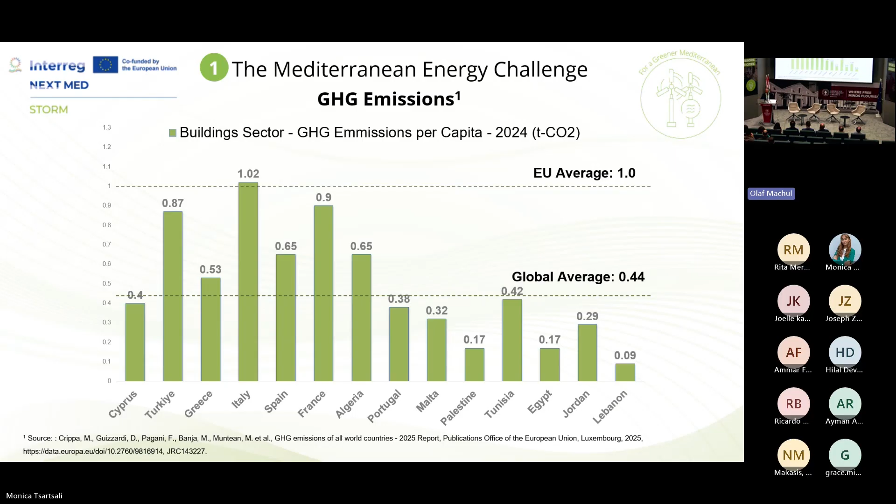The global average, if you just want to have a feel of the numbers, for the greenhouse gas emissions is around 0.44 tons of CO2 per capita. The EU average is 1. And you can see here that many countries in the EU, in the Mediterranean, are at the higher upper bound of the emissions. There are other countries that have less emissions. But the idea is to see from where these emissions are coming.

And if you only take space heating of buildings, you would see that the source of energy that is used to do space heating is generally from fossil fuels, even with all the effort that has been done in the last 20 years to support the use of renewable energy. So if you look at the statistics, there's only 33% of the demand for space heating that is being replenished by renewables in the EU. If you look at Lebanon, it's even worse. I mean, 90% of the sources of energy for space heating is fossil fuels, whether it's diesel, whether it's gas, combination, electricity, etc. So this is the challenge.

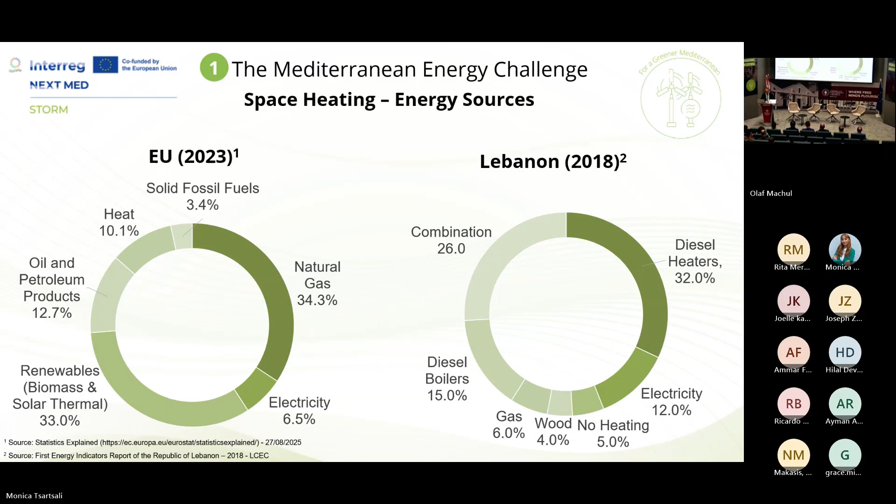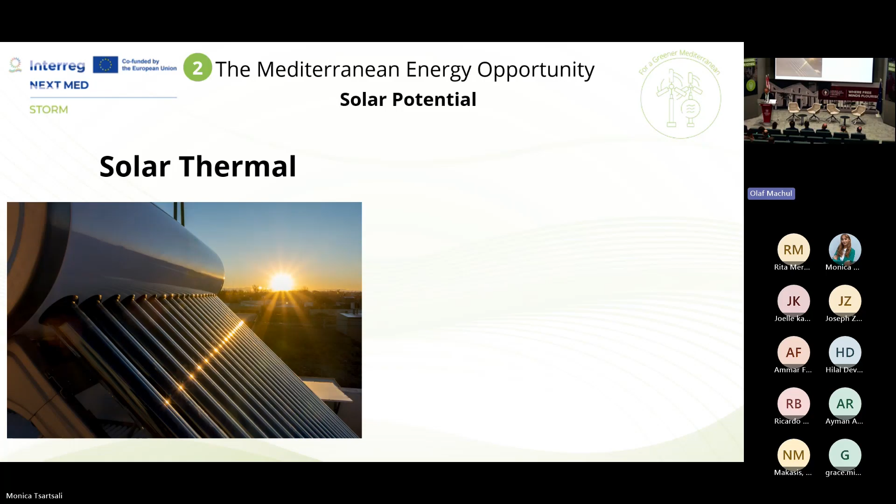Now, how do we harness that, or how do we make use of this advantage? There is technology right now that allows us to use basically sunlight to change it to energy. The 2 most common technologies that are available out there are either solar PV, and this is for generating electricity, or solar thermal, and this is basically a technology that allows us to heat a certain fluid. It could be water, a mixture of water and other material, to get thermal energy and then try to make use of it. All of us have seen these on roofs, whether the PVs or the solar collectors.

Now, the problem here is that when we talk about space heating in particular, as an example, when we need space heating, it's in the months that the sun is not there, or it is basically less available.

And the irradiation is at its lowest. So there is really a need to be innovative when it comes to figuring out how to use the solar potential that is in the Mediterranean. And the thing that comes to mind to try to match this mismatch between the availability of the sun and the need for the heat is by trying to store that energy.

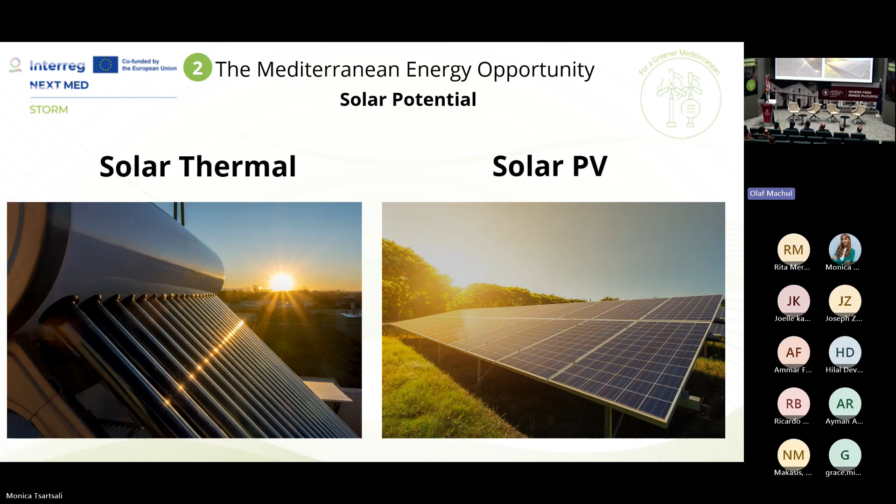So try to collect it in the months where it is available, put it in a place that will hopefully keep it there as much as we can, and then use it when the winter comes to try to provide space heating to buildings. So this is the idea of seasonal thermal energy storage. The question becomes, where do you put that heat? And here also there are alternatives.

One of the alternatives is to put that heat in the ground and store it in the ground, natural soil, natural rock. And in this technology, we're talking about having to drill in the ground to be able to create some kind of heat exchangers that would allow us to transfer the heat from the fluid that is coming from the solar collectors to the ground. In a minute, I will go into the technology a little bit more and explain what is happening.

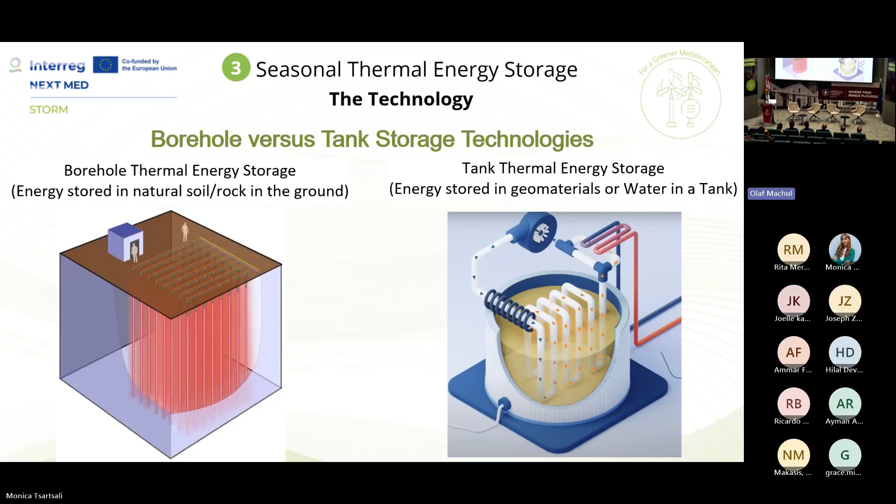The other way to store that heat is by creating artificial tanks. So we can create a tank that is made of steel or concrete. It could be above ground, it could be underground. This is a manufactured tank, not a natural soil or rock like the borehole technology. And then you have to insulate that tank and store that heat in it and hope that it will remain there for the season of charging until you reach the winter where you want to discharge it. There are so many permutations to these technologies. We will focus on a couple today, and I will show a couple of case histories before we start.

Now, what is the technology? The technology, as I said, in a very simple step-by-step procedure. You have to use some kind of solar collectors to be able to get the energy from the sun. There are so many technologies out there. There are flat plate collectors, evacuated tube collectors. Doesn't matter what it is. The idea is that you get a certain square meters of these collectors, and then you circulate a fluid through them. That fluid will increase in temperature to values hopefully in the order of 80 degrees, 90 degrees.

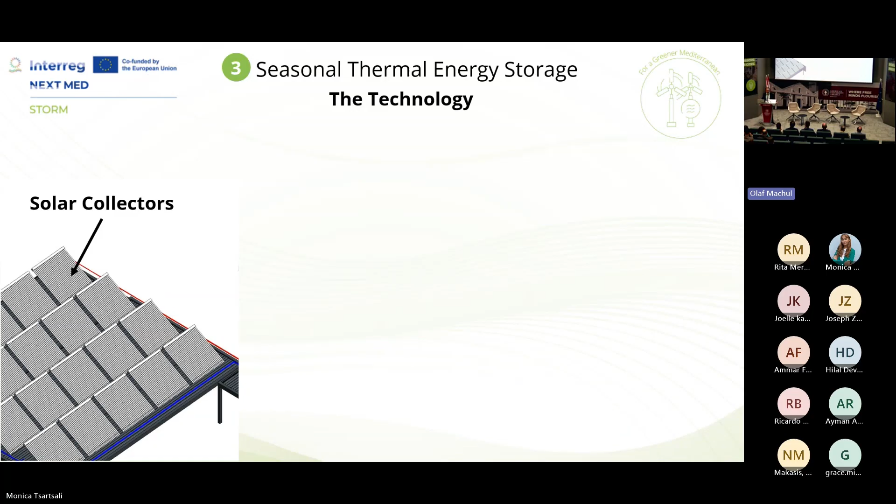And then you take that hot fluid, and for the case of boreholes, you drill boreholes in the ground, maybe up to 30 meters, 50 meters, 100 meters, depending on the application. And in those holes in the ground, you put tubes. And these tubes basically allow you to circulate the hot water through a pump. And if you circulate at the right flow rate, you will give enough time for that heat that was collected to enter into the rock or the soil. And by the end of the charging season, you could end up with the rock in that location having temperatures in the order of 40, 50 degrees, depending on the application.

Now, unfortunately, there's no way until now to keep that heat in the ground. So by the time you reach winter where you're going to use it, a big portion of that heat will have dissipated into the rocks that are beyond this borehole thermal energy storage system. So there are losses, of course, but still what remains is enough to have an impact. And it's all renewable energy, pure renewable energy that you can use for space heating.

So the next step, after you have charged the ground up to 50 degrees, let's say, when the winter comes, you circulate cold water now in the ground. As this cold water circulates, it gets heated up, and usually you pass it through a buffer tank first, and then you take it to the building. So if the building is now using diesel oil to heat water, to heat the radiators or the underfloor tubes, now you use hot water that's coming naturally from the ground, 100% renewable, to heat your homes. Same technology, same everything, except that the source of the heat is not burning fossil fuels anymore. It's heat that was collected back in the summer and that remained in the ground until the winter season.

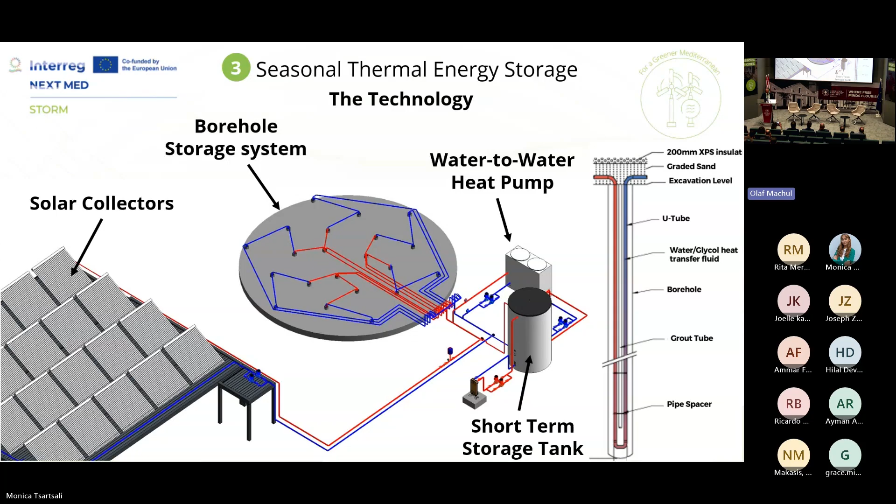So I will share with you 3 case histories where this has been used efficiently, and these come from 2007 all the way to 2025. The technology, as you will see, is improving. People are doing tweaks to make it even more efficient. The cases: one of them is in Canada, the Drake Landing. The other one is in Norway, the Fjell School. And the last one is in Slovenia.

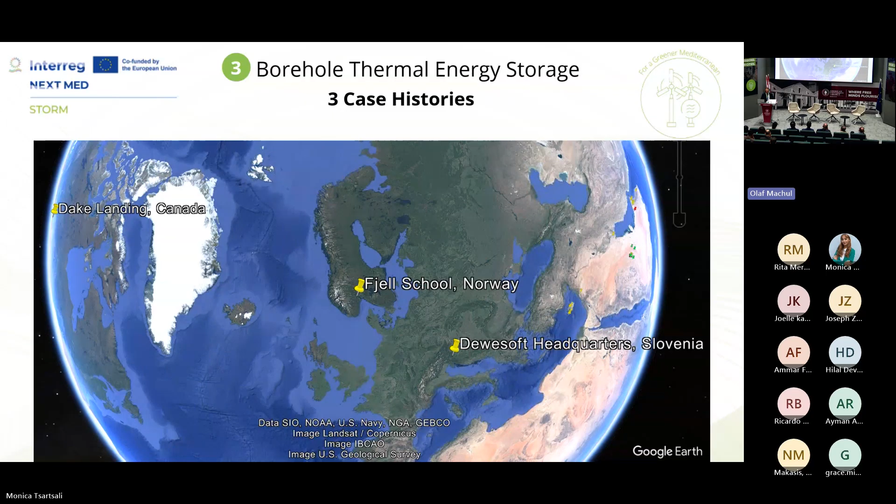So let me start with the one in Canada. This is one of the most famous case histories where this technology was really demonstrated. This case involves 52 homes in Drake Landing in Canada. These homes are in the most severe winter conditions in the world, sub-zero degrees throughout the winter.

In this particular case, there were around 2,300 square meters of solar collectors that were installed on the parking garages of all these homes. And these basically had the function of collecting hot water. The project basically involved harnessing all this energy and putting it in the ground through 144 boreholes that were drilled to 35 meters in the ground. One of the largest borehole systems at that time.

During the charging season, which is the summer and part of the spring, 700 megawatt hours of thermal energy were harnessed and pushed into the ground and stored. By the end of the charging season and during the extraction, only 300 megawatt hours were able to be extracted from the ground, giving this system an efficiency of around 35%. So they were able to collect 700, but at the end of the season, they were only able to use 300 or 350. So this tells you something about the efficiency of this whole system in its existing practice.

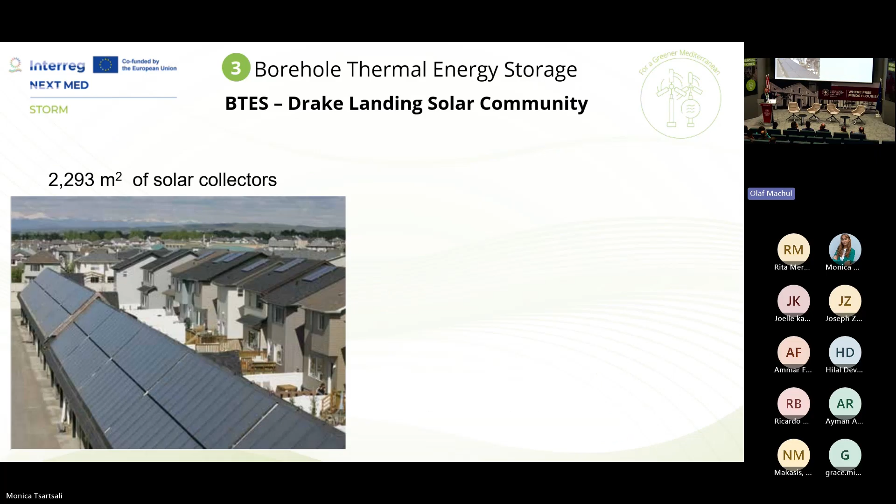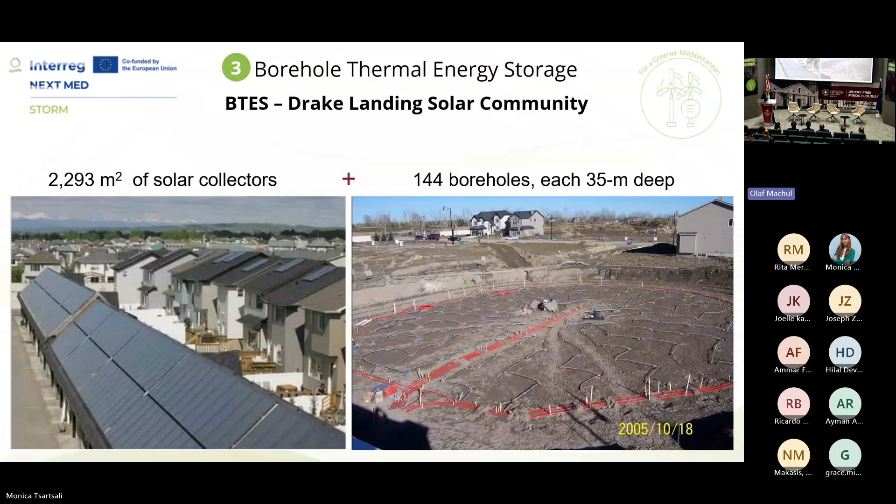We're very excited that we're going to be implementing, as part of STORM, 2 of these systems, one in Beirut and the other in Palermo. And we will get the chance to talk about them today in detail. The team will be presenting them soon.

One of the key secrets for having this system work efficiently is if you already have a district heating system existing in the region. And this is not present in many of the Mediterranean countries. This is present in almost all of Europe. The presence of a district heating system allows you to plug your borehole thermal energy storage into it. So this is a challenge when you're dealing with an area that doesn't have district heating and you want to distribute the heat to a lot of buildings.

Some numbers, and I think I need my eyeglasses to see them here. Maybe I can see them from there.

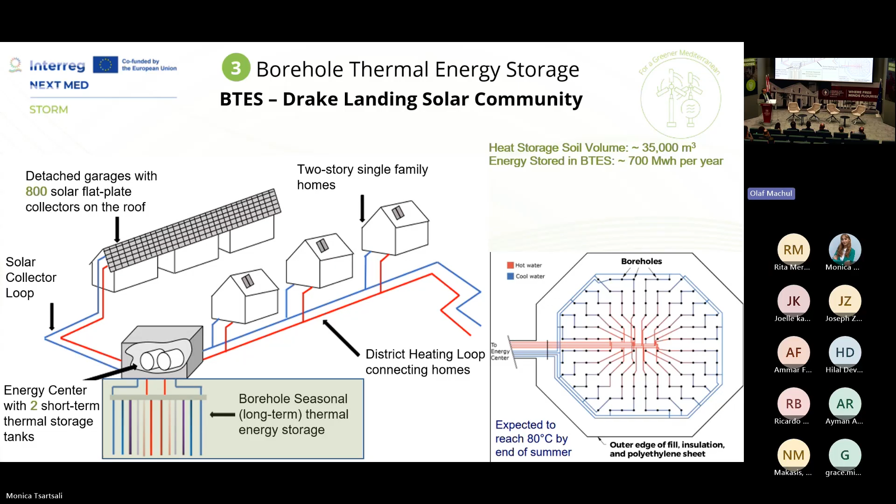So the heat storage volume, which you can think about as if it's a tank, is in this particular case history 35,000 cubic meters. So the rock that was heated up to 50, 60 degrees in this case is 35,000 cubic meters. This is how you get your 700 megawatt hours. This is not a small number. The energy stored in the BTES is 700 megawatt hours, as I mentioned, and the extraction efficiency was 35%.

So let me take you to the newer one. This is a case history in Fjell in Norway. If you look at this system, it's a school, and this gives us an example of the applications of this system. So it's a full-scale school. In this particular application, the system includes solar collectors also, but not as a main primary component. These are just to support the system, 125 square meters.

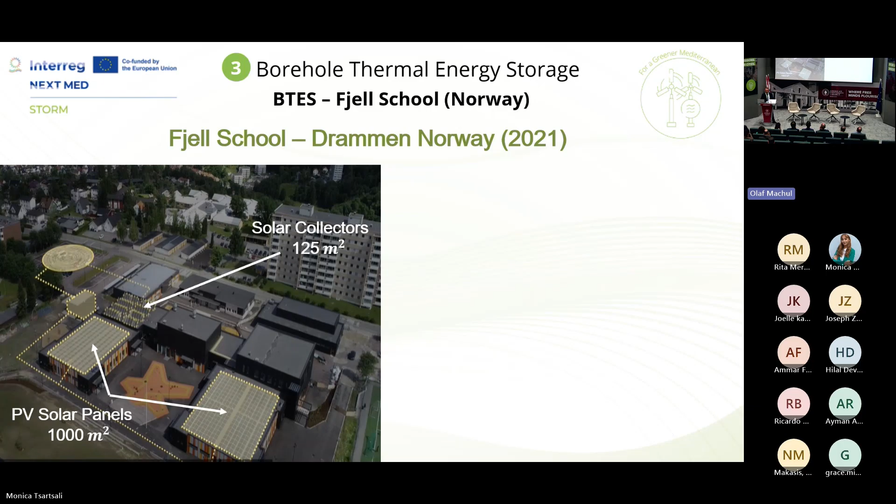We have 1,000 square meters of PV solar panels. But the interesting thing is that they did not use the solar panels to provide electricity to the school. The solar panels here in this case were installed only to operate a heat pump using renewable electricity. And the heat pump had the objective of producing the hot water.

So here we're relying a lot on PV electricity to heat water through the heat pump and then get the hot water and store it in the ground, 100 boreholes, again, 50 meters deep. This is a typical practical case history that can be applied anywhere. Some statistics also, the facility itself is 8,000 square meters. The solar panels, if you add the two types together, 1,125.

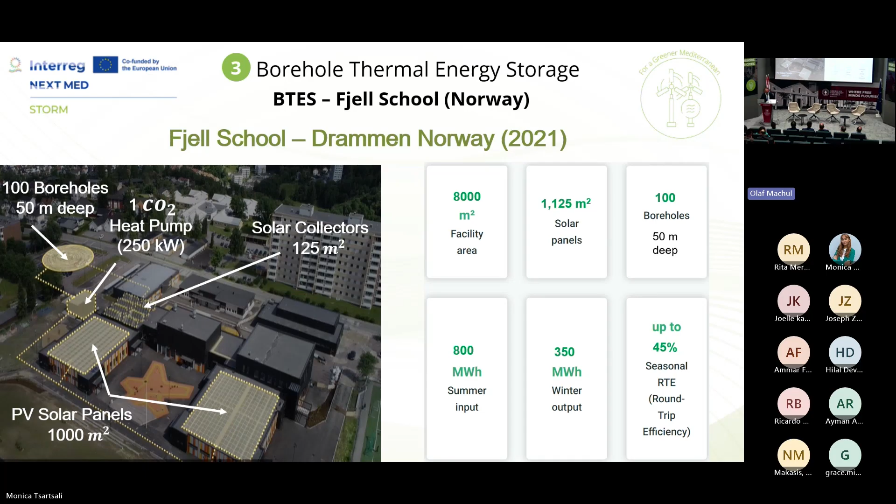And this system was able to produce 800 megawatt hours, so very similar to the case of Canada. And out of this, they were able to extract 350, giving around 40–45% in terms of efficiency. So here the change is that there is a need for a heat pump. In the case of Canada, they didn't use the heat pump. They just relied on the temperature that's coming out of the ground.

The final case history, so that I don't take a lot of time, is the most recent; it's in Slovenia. It seems the trend now in these systems is to move to a heat pump as a source for the hot water. It seems that calculations are showing that this could be the most efficient system. So here we have 400 square meters of solar collectors, 2 air-to-water heat pumps that are providing the hot water to be able to charge 55 boreholes, 27 meters deep.

So the scale of these things is starting to become smaller and more targeted towards certain structures. Previously, it was bigger scale for district heating for areas. So this is what we're aiming for in STORM, to test these systems in decentralized systems that could be at the order of a villa or a house or a 10-story building or a 5-story building.

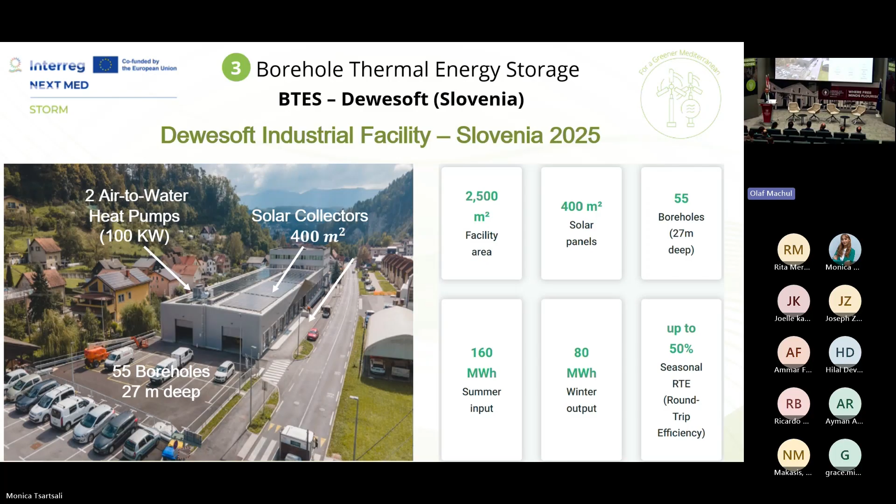So in this case, the facility is 2,500 square meters. The solar collectors are 400. And this system charges 160 megawatt hours per year. And you can extract out of it 80, meaning 50% efficiency. This is one of the cases with the highest efficiency. This picture shows you again what the system entails. It's about drilling the boreholes, connecting them with a network of pipes properly, and in this case, adding a heat pump that will be the source of the charge of the system.

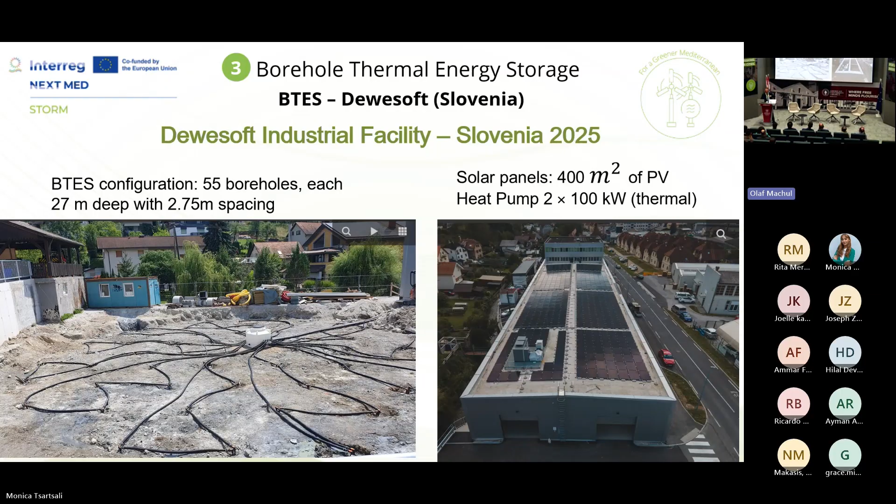The nice thing that I like about this case history, it is very well documented and it has live data. So now if you want to research the Dewesoft Industrial Facility BTES, you go to their website and you can look at what is happening right now in terms of energy entering into the system, leaving the system, the temperature of the boreholes, the flow, etc. So if you're interested in this, you can check it out, and it's really interesting to look at it.

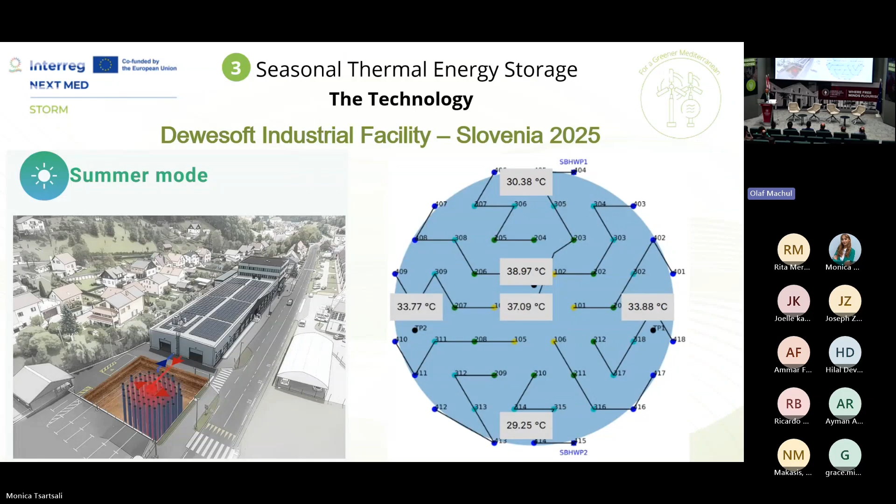And what they use in this case is an insulated tank that can be in different sizes. They fill it with sand. They're using sand as the storage material. And they're using electricity to heat the sand up to temperatures in the order of 600 degrees.

So here we're talking about a totally different application. The ones that we were talking about were water, hot water. Now we're going up to 600 degrees. You're talking about sand, no limit on the temperature that sand can take. And when you reach 600 degrees, now you can provide a service that is really very highly efficient, and it can provide you with temperatures that are at a very, very high level. And you can even do electricity production with this using a steam engine or any other technology.

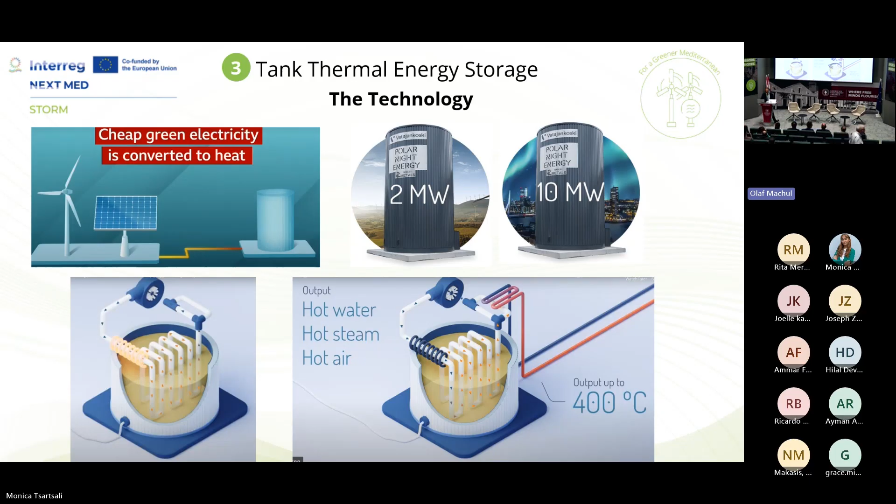So I'm not going to talk more about the systems, and I don't have time to talk about other case histories for tanks, but they are there. And we have our partner in Jordan that is trying the technology of a tank in one of the pilots. So overall, we have 3 pilots that are being implemented from scratch in STORM.

In terms of cost, I think the question that always is the one that is hidden, we don't want to talk about it, is cost. These systems still cost a lot of money, especially if we're doing them at a decentralized, small-scale fashion. So when you go big, the cost goes down in terms of cost per cubic meter of, let's say, water at a certain temperature. So the trick now is that the technology is advancing a lot, and the cost will surely, with time, become more and more,

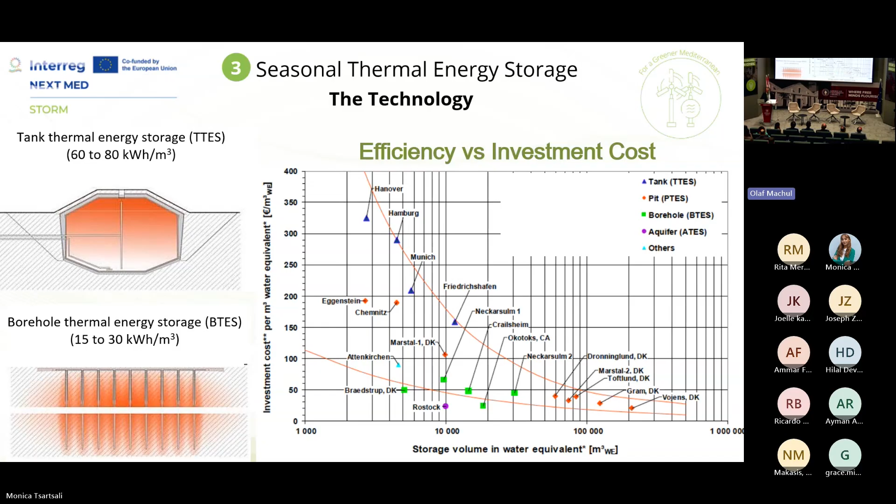let's say, reasonable. But still, these systems can have a return period on investment that could be reasonable, given the added benefit to the environment. But still, cost is really the thing that is negative at this point in these technologies.

So to wrap up, why are these technologies not yet available in our area? There are many reasons. First of all, there's not enough data that show their efficiency and how good they are. The likelihood of success when there is no district heating system network is relatively low, so you have to deal with this as a constraint. Economic feasibility is questionable, and we have limited knowledge about the behavior of soils and rocks, natural soils. It's a complicated technical problem to really model what's going to happen in the ground when you start heat transfer using these systems.

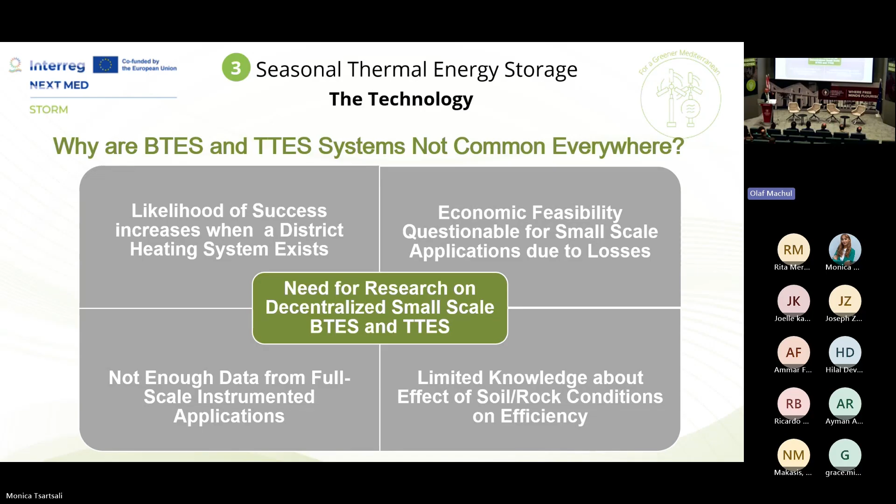So there is a need for research on decentralized small-scale BTES and TTES systems, and this is what STORM is trying to do. The expected result from STORM is to have, at the end, an enhanced visibility and access to these innovative, cost-effective, tested solutions. We want to test them ourselves to see how they work in the small scale, and eventually to be able to tell people about their use, how good they are, how bad they are, where they are efficient, where they're not, based on our own experiments and research.

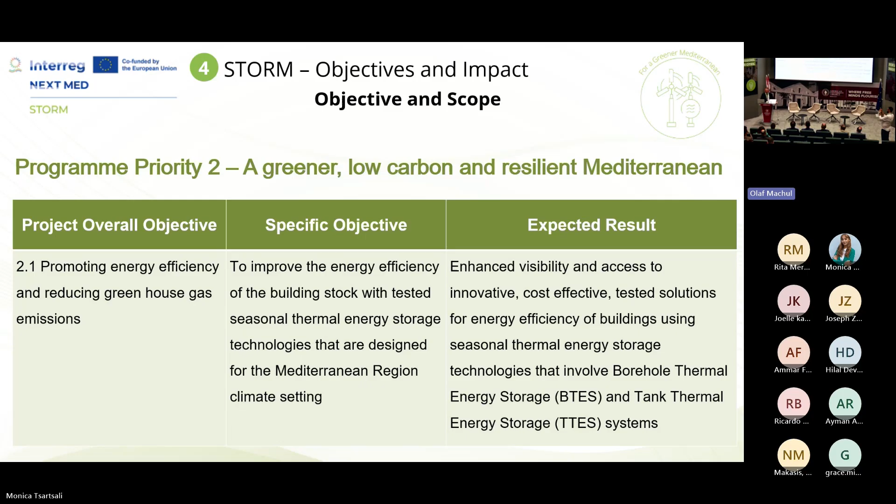The objectives of STORM, without going into the details: we want to raise awareness of this technology in the Mediterranean. We want to encourage its adoption. We want to demonstrate its effectiveness, and we want to develop some kind of long-term strategies for their use. This is my last slide. As I said, STORM has 6 partners in it. AUB is managing and coordinating the project, and we are leading the communication part of it.

Our partners in KIM-BCN are leading a digital platform that is part of STORM, and they will talk about it today. Our partners at the University of Campania are leading Work Package 4, which is focused on design and coming up with practical design toolkits that will help people use this system, which is unknown to many. Our partners at the University of Palermo are leading the Work Package on the pilots. And we have our partners in Jordan that will lead Work Package 6, which will focus on policies and strategies. Of course, AUB Mediterranean is the 5th partner, and we have the Lebanese Center for Energy Conservation in Lebanon, LCEC, as our final partner.